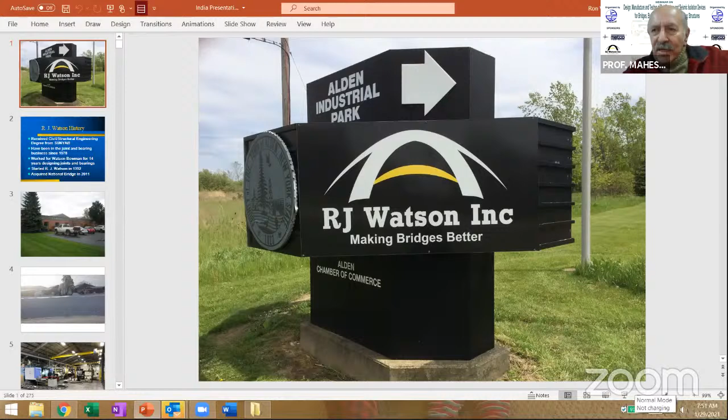Thank you very much for that nice introduction. So the topic is bearings.

I think you covered my background, but one point I wanted to make is I used to work for a company called Watson Bowman, which is a familiar name to many engineers. That was a company my dad started back in 1970. I worked for him for many years, but he sold the business in the 80s, and then I continued working for the new ownership. In the early 90s, they decided to get out of the bearing end of the business to focus more on joint systems, and my training and background was more on the bearing side. So that's when I started RJ Watson back in 1992.

More recently, we acquired one of our primary fabricators. We're located actually in Western New York, in the Buffalo area, which is on the Canadian border, so we get a lot of snow in the winter. That's what it looks like in the winter in front of our building. It's minus 15 today, so it's quite cold.

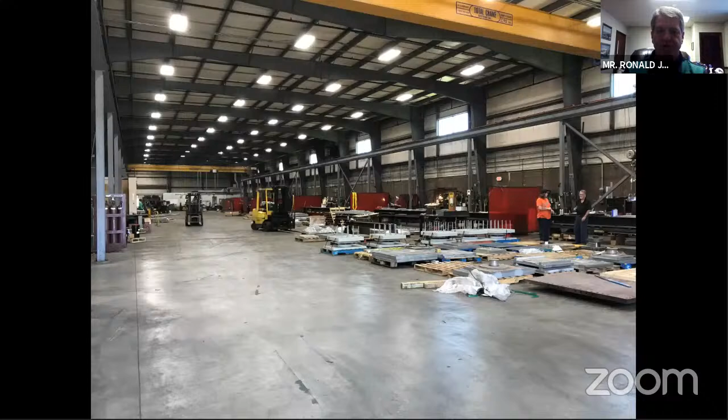So our shop is broken into three primary areas. We have a machining area where we have vertical and horizontal mills, lathes—here you can see a plate being machined flat. We also have a fabrication bay, which is where we do the cutting, bending, and welding of steel plates. And then we have an assembly area, so once all the parts and pieces are finally put together, we have the area where we assemble the bearings together.

And then the last and one of the most important parts is the testing area. We have three test frames that we utilize for testing bearings on projects. So talking about bearings, I always like to start with: what's a bearing supposed to do? And I think the Professor explained it pretty well—they have to take loads, movements, and rotations.

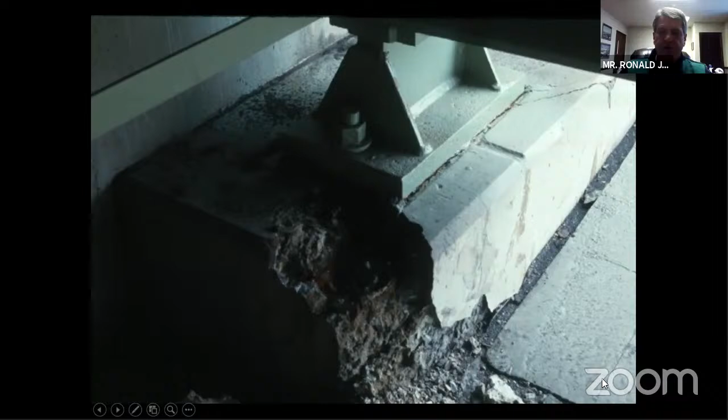The problem with the old steel bearings is they're really one directional—they work in the direction of the girder. The problem we see with these on some structures is where you have evidence of transverse rotation, these bearings are unable to accommodate that. So that's probably what happened here: you're getting some transverse rotation, the bearing is unable to deal with it, so you get the cracking below.

The other problem with the old steel rocker style bearings is they can accumulate dirt and debris underneath the rocking points—that's what we call the ratcheting effect. This has been a problem for many years. So that's probably what happened here: you get this rocker bearing not able to function, and you can see some of the substructural damage. For skewed or curved girder bridges, again you're getting those transverse rotational forces, and these rocker style bearings aren't able to deal with that—here you can see some example of substructural damage.

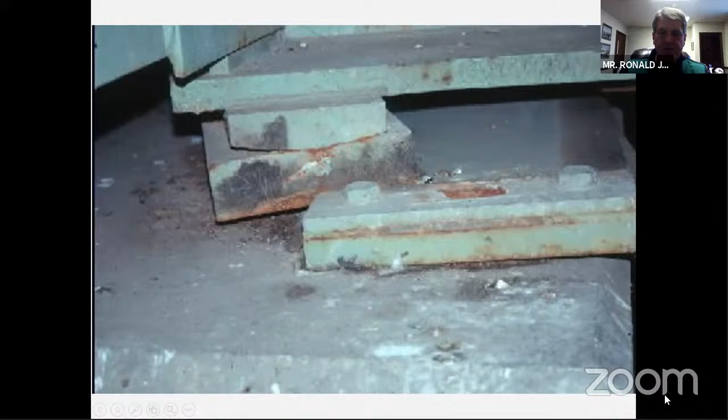This is kind of an interesting one I saw where the base plate was walking out. Normally those anchor plates are bolted down, but for some reason this one wasn't, and it's sort of walking out from underneath the bearing. We had a bridge up in Albany, New York, that was sitting on one of those tall steel rocker bearings, and during a temperature extreme, it actually tipped over—this is supposed to be standing upright.

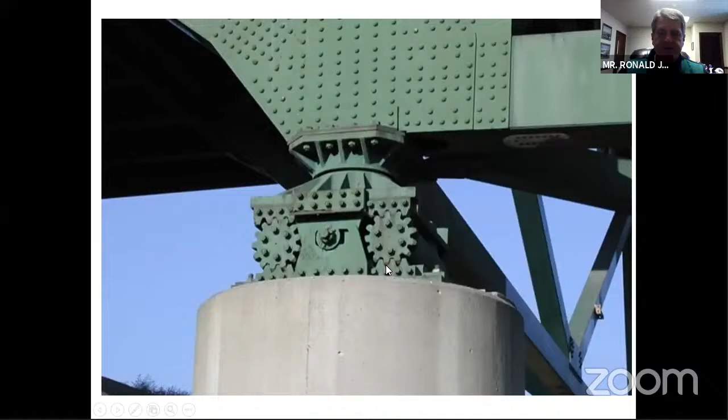The bearings on that structure were the rack and pinion geared roller style bearings, very expensive bearings, as you can see. The problem with a bearing like that is you'd have to have some kind of regular maintenance program to keep those gears lubricated. And sadly, I know especially in the U.S., we don't spend a lot of money maintaining bridges. They're not funded, and it doesn't typically happen.

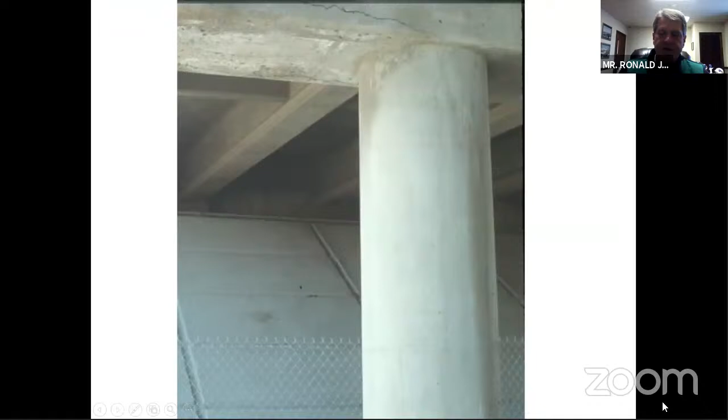As was this structure. This is the monorail structure in Las Vegas, and had a hammerhead pier, and they went integral with the design. But look at the cracking that's going on. It actually goes all the way around that hammerhead to the backside as well. Now, had they chosen to use some type of a bearing, they might have alleviated some of the stresses that went into that pier.

But the workhorse bearing we see used on most bridges is the rubber bearing or elastomeric bearing, typically neoprene or natural rubber, reinforced with steel plates for shear stiffness. So for most of your short and simple span bridges, these work well. The problem, what we see, is a lot of owners like these bearings, and then they try to push the envelope and try to use them maybe in applications where they really shouldn't. So we see a lot of big elastomeric bearings being utilized. And most of the problems I've seen with these have been on the very large ones.

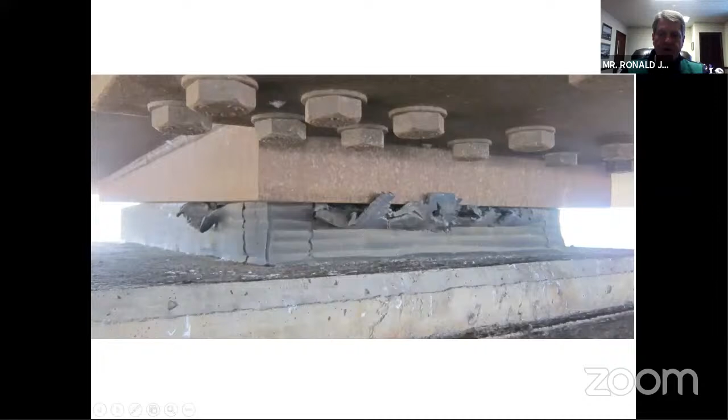Oftentimes you'll see bulging up on the edges of the pads too. This is a very large one on a bridge in Mississippi. And so, you know, engineers say, well, what's the problem with that? Well, if you cut it open and look at it, that's when you have bulging, that's what's going on the inside. So that would be a sign of some serious problems with that particular pad.

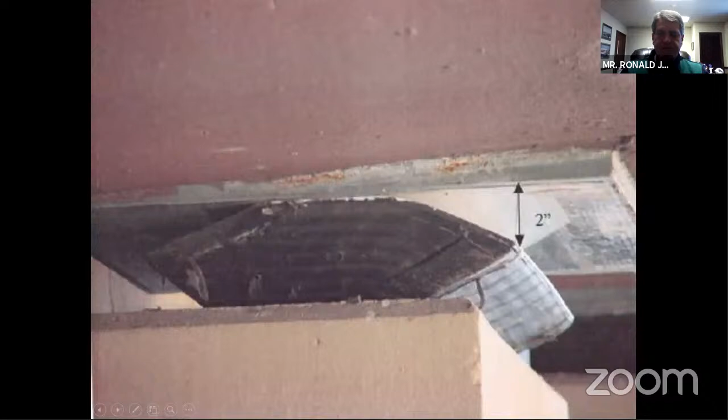Installation problems, again, things like that you see with all bearings. This is a picture I got from a Colorado bridge engineer, and they used these big pads with sliding on top. And as it was cycling, for some reason, it wasn't recovering. So maybe, you know, maybe that's a design flaw. The plates weren't thick enough or something like that. But again, these are big pads that you don't necessarily want to do.

And then lastly, we've had a lot of reports of pads walking out. So as it cycles with movements and rotations, the pad is actually walking out from underneath the girder. So that's a problem too.

Now, pot bearings were developed as a way to reduce the plan area of a rubber bearing. So you put much higher pressure on the rubber in a pot bearing. In this case, you're going up much higher. So what happens is the rubber becomes unstable. So you have to have some kind of a sealing ring around the perimeter.

There's a lot of different materials being utilized for sealing rings. But this is where we've seen a big problem, especially in the USA, is these sealing rings failing prematurely, and when that occurs, the rubber kind of squishes out of the cavity.

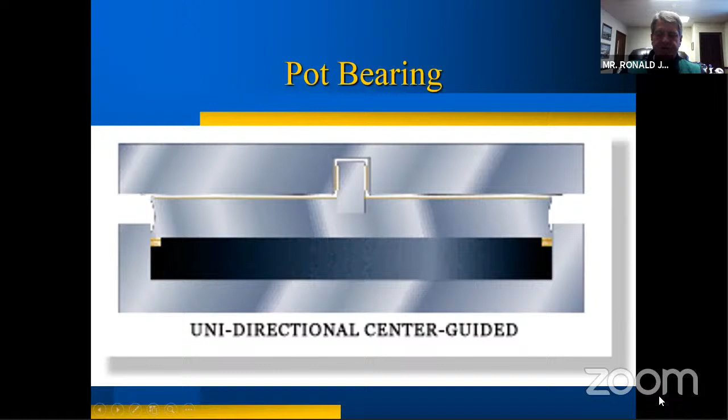So with these problems in mind, the disc bearing was developed. Disc bearings, as stated earlier, were developed in the early 1970s. The key is the use of this polyether urethane load and rotational element.

Polyurethanes have tremendous compressive strength, excellent weathering properties, and a very wide operating range. It remains stable and flexible from -70 to +120 C, so for normal atmospheric conditions it remains stable and flexible.

In its simplest form, as a fixed bearing, it's just two plates sandwiched together with a central pin there to transmit the horizontal forces. The way this works is you're compressing that polyurethane, the material wants to expand, but the friction between the plate and the urethane rubber inhibits the expansion, so you get a bulging effect on the edge of the disc.

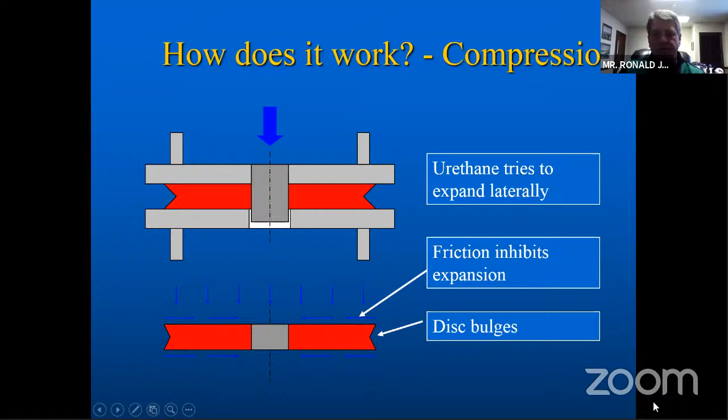The reason for the V-notch in the edge of the disc is to reduce the shape factor and control the amount of deflection you get under design load and rotation. So if I load and rotate that disc, this is what it looks like - there's the rotated edge, and it just fills in that cavity. Close-up view, you can see what it looks like there. So that's the function behind that V-notch in the edge of the disc.

So these are examples of fixed bearings. Again, it's a very simple design.

If you want to introduce some displacement capability to the bearing, then we add the sliding materials. Typically we use PTFE, although there are other materials now being utilized for sliding friction, but PTFE offers the lowest friction of anything. Oftentimes it's lubricated, so you have dimples there and you put silicone grease in there. We bond it to the upper bearing plate, but we also recess it in there, so it's mechanically locked as well as chemically bonded.

Mated up against stainless steel, you get very low friction. Usually plain PTFE you get around 2% friction. If you lubricate it, it's even lower than that, even less than 1%. So now you have a bearing that can move in any direction, but also rotate in any direction as well.

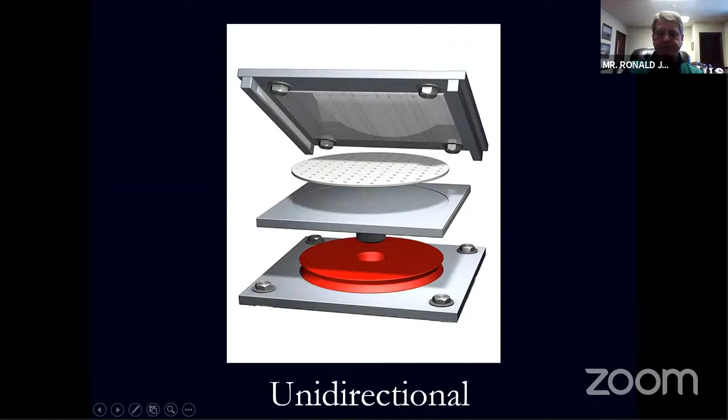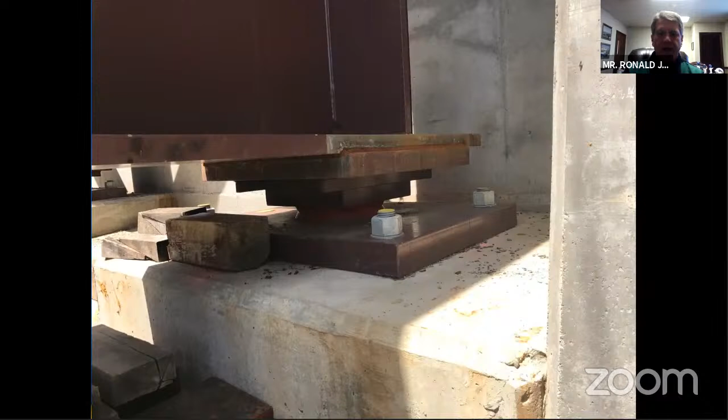But the polyurethane we're using has tremendous compressive strength. We load it to 35 megapascals, which is the allowable, but the ultimate strength is probably 20 times that. So you have a tremendous safety factor in the vertical load carrying capability of the polyurethane.

A big project we've been working on for several years now is in New York City - LaGuardia Airport. They're spending $8 billion to redo LaGuardia Airport, so it's crazy, but we've got lots of bearings. When they redo the terminals, they redo the roadways in front, so there's over 1,000 disc bearings at LaGuardia Airport now.

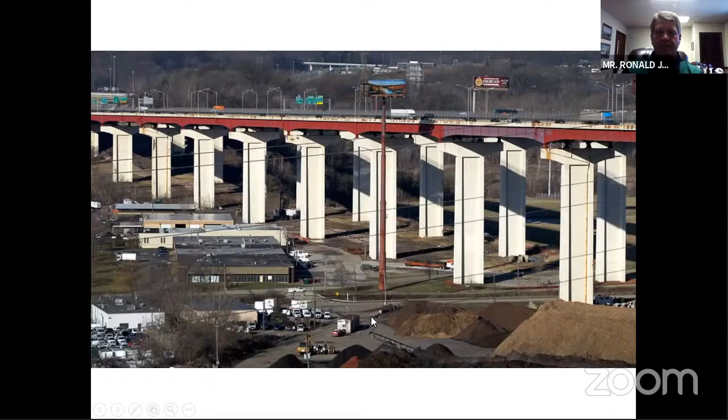This is a big project we did in Cleveland, south of Cleveland, not too far from Buffalo. These are parallel plate girder span bridges. It's the most heavily traveled bridge in Ohio. The bridges are 40 years old, but really the issue is traffic.

Rush hour, morning and afternoon, looks like that, so they needed to expand it. What they're doing is building a new bridge in the middle, and once the new bridge is finished, they'll switch traffic back over to the outer sides.

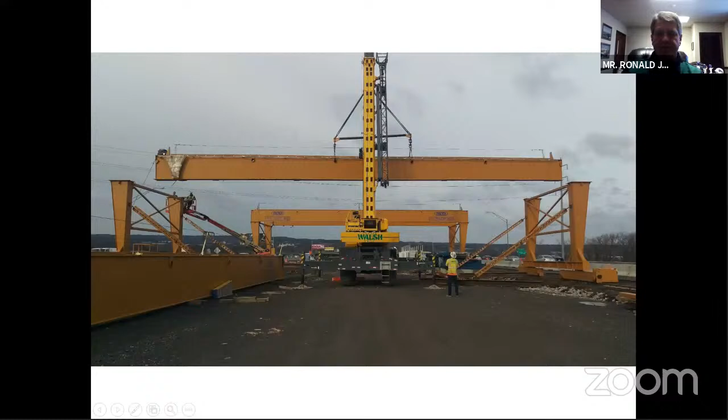So they have this little erection gantry they use to drop the girders in place. Here you can see a picture of that. It spans the two existing bridges, and they pull the girders up from below, so you can see how that works. There are 133 bearings on that project. The loads are pretty standardized, not too high.

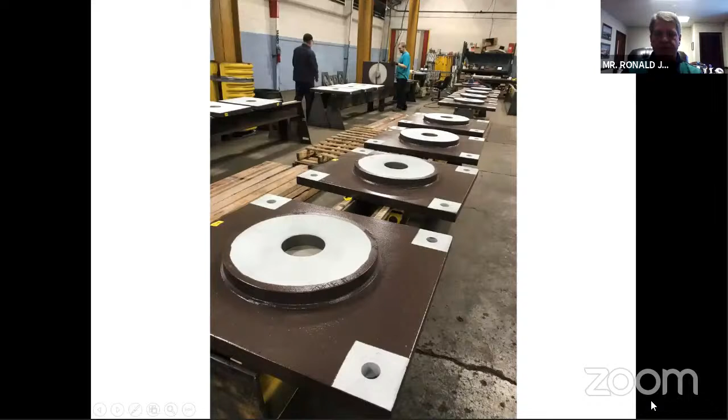So there's your masonry plates, then you weld the lower bearing plate to that. There's some painting going on as well. You don't paint the surface that comes in contact with the disc, that's a sandblast surface, you want a roughened surface there. Then they're fully assembled, so there you are.

We're doing a field weld. Again, when field welding, you want to maintain certain temperature limitations so you don't overheat the PTFE or the polyurethane, so care has to be taken for that. There you can see one of the installed bearings. Then we always put a little information plate on each bearing with the manufacturer, date of manufacture, the bridge, the bearing type, and all the pertinent information is on there.

So there you can see that's the new bridge. Now they're going to retrofit the existing lane. It's kind of a cool project.

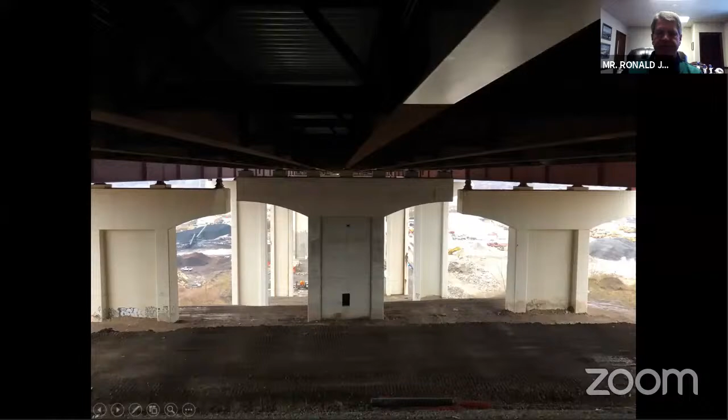Here's a neat bridge, this is a Delta frame design, so the bearings are actually down here below. This is in West Virginia. There the bearings are shipped to the job site, then you set them up on spacers, and they're grouted into place. That's the finished bridge. Those bearings are actually quite easy to inspect since they're down so low.

Steel boxes use disc bearings. This is in Orlando, Florida. In this case they have two bearings supporting the steel box. Nice looking detail for a bridge. This is another steel box application.

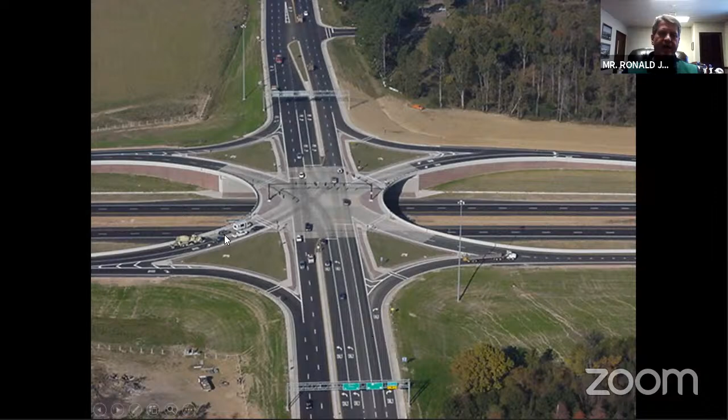There's a lot of different designs for interchange exit and on ramps. This is a SPUI, single point urban interchange, so these are ways to deal with traffic getting on and off the bridge. These are steel boxes, and it's interesting here, they have 2 bearings on these boxes and then 1 on the outer boxes. So interesting design detail there.

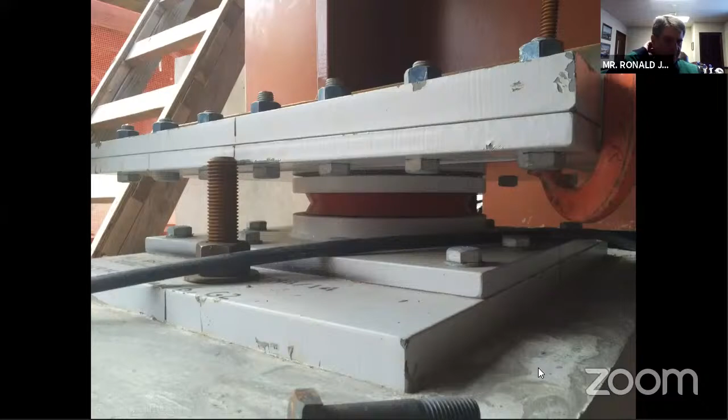Steel arches, this is the Sellwood Bridge in Portland, Oregon. Little shout out to the iron workers who built that bridge. So there's one of the bearings at the abutment, you can see the disc bearing being installed. There's also bearings on top of the spandrel columns too.

And then there's bearings, actually lateral bearings between the shear block and the arch rib, so we do a lot of lateral bearings as well. There you can see a disc bearing installed like that. Now the lateral bearings are only maybe activated during wind or seismic loads, but the nice thing about the disc bearing is it can accommodate rotations at low or even zero load, there's no minimum load required for that bearing to accommodate rotations. So we do quite a few of these lateral bearings on big bridges.

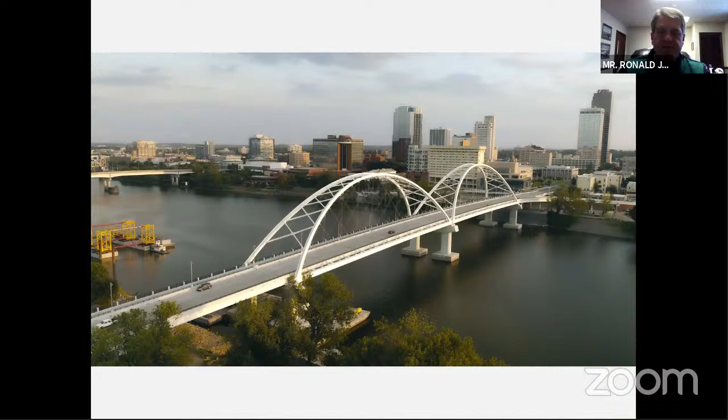This is one in Arkansas. This bridge sits on disc bearings as well, nice looking structure. But they had an interesting application during the erection of the arch ribs here, they have these temporary struts as you can see here, and at the base of that strut is a rotational disc bearing.

We also worked on the Hoover Dam Bridge. This is on the Nevada-Arizona border, not too far from Las Vegas.

If you're ever in Las Vegas, this is not too far away. This is a North American record, about a 320-meter span for a concrete arch. 24 disc bearings are on the tops of the piers there.

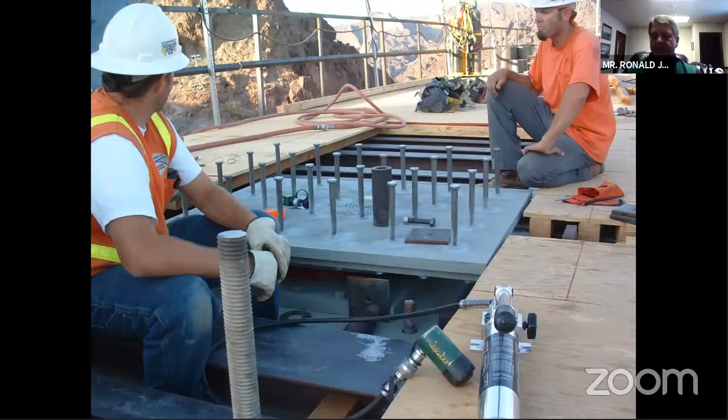The renderings are so good now you can't tell them from the real bridge. But most of the specifications we deal with have a replaceability detail being required of the bearing, should something go wrong, so that you can get at it and remove it.

So here's a pretty typical detail. You have a cast-in plate, but the upper bearing plate is bolted into that. Similarly, you have the masonry plate grouted in, but the lower bearing plate is bolted into that. So to facilitate removal, you would jack the structure, draw those bolts out, and you can pull the bearing out in one piece.

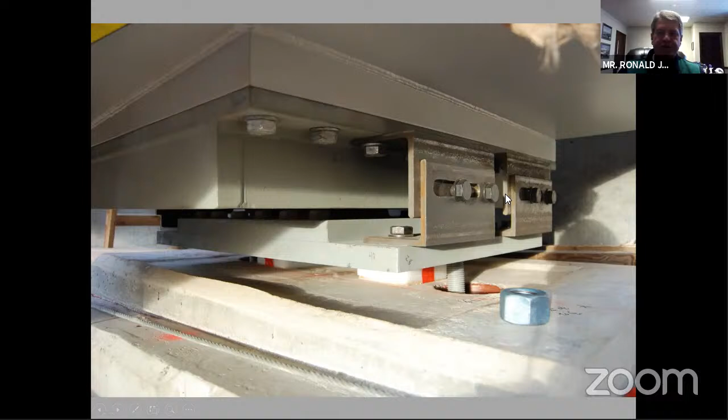That's about 300 meters up, which is a little higher than I normally like to go when I'm looking at bearings. These bearings are big, but in some cases slide bearings, so they can move around on you during installation. So oftentimes we'll put external hardware like this on the bearings, which connects the upper and lower plates. It's slotted, so you can adjust it for the temperature setting. Once the final connections are made, you take that hardware off.

Now, the reason this was like that on this bridge, they had not installed the joint yet, so that was temporary. But that's something when you're doing your inspections, you want to monitor that the deck water is not pouring down on the bearings, especially up in our part of the world, where we dump road salts, de-icing salts on the highways. That salt water getting down on the bearing could cause problems. So that's something you need to deal with.

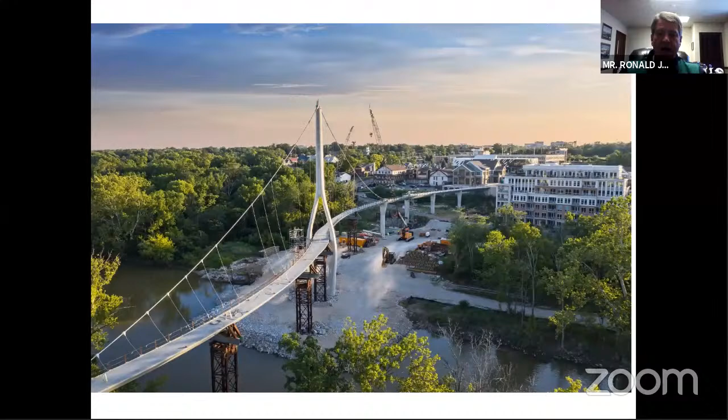I say new bridge, it was actually 13 years ago, so it's not so new anymore. But that bridge, start to finish, 11 months. So if you get everybody on the same page, you can do stuff like that.

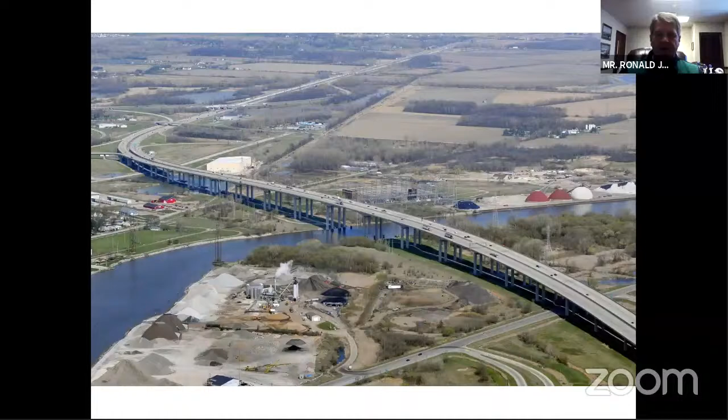This was a retrofit we did, I-75 up in Saginaw, Michigan. The original bearings were pot bearings. All of them failed - there was like 130 of them. They had the sealing ring failures, and they decided to replace them. So we replaced them with some disc bearings.

I forget which bridge it was, but I went out two years later and the temporary hold downs were still on there. So we paint them bright yellow just so people remember to take them off when they're done. But that's a big bearing.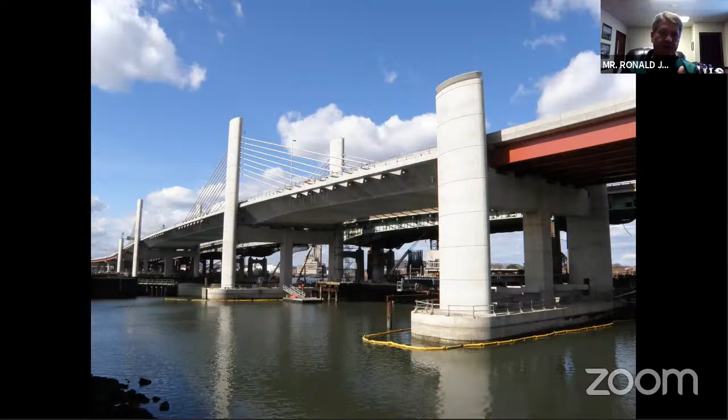This is what we call an extradosed bridge. I know there's extradosed bridges in India as well, but an extradosed bridge is a cable supported bridge, but instead of big tall towers, you have a short squat tower. So this is cost effective in a certain span range, but the main pier here, big heavy concrete bridge, some of the bearings were designed for over 45,000 kilonewtons.

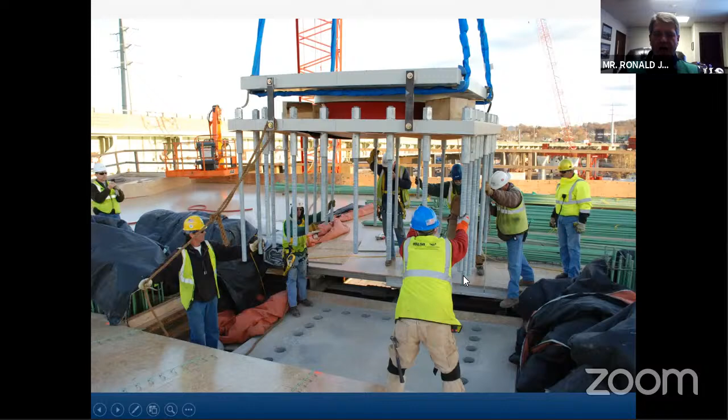There's a picture of them doing the installation. They're sitting there as I was watching this, hoping those anchor bolts line up with those holes, but it worked out in that case. So of course they wanted that tested.

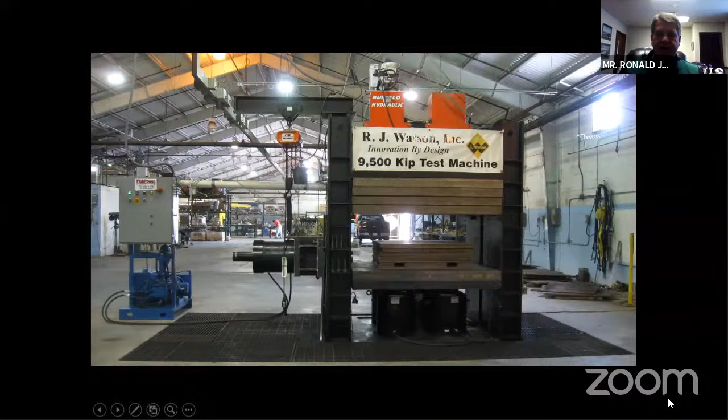We have a test frame that goes up to maybe 40,000 kilonewtons, and there's the vertical actuators, lateral actuators for horizontal or friction testing. There's the big, we have a large displacement actuator, so we can do like plus or minus 650 millimeters on a test frame. So if you have some large displacement bearings, we have that capability to test it.

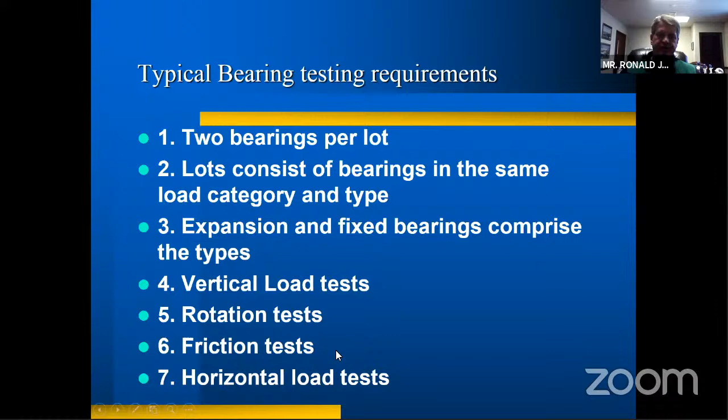Just to talk a little bit about testing: typical testing, you have to test two bearings per lot. Lots are usually limited to 25 or less bearings. They're usually bearings of the same load category and type, so they might be broken into fixed and expansion bearings. And then we usually run vertical load tests, rotation tests, friction, and horizontal load tests as well.

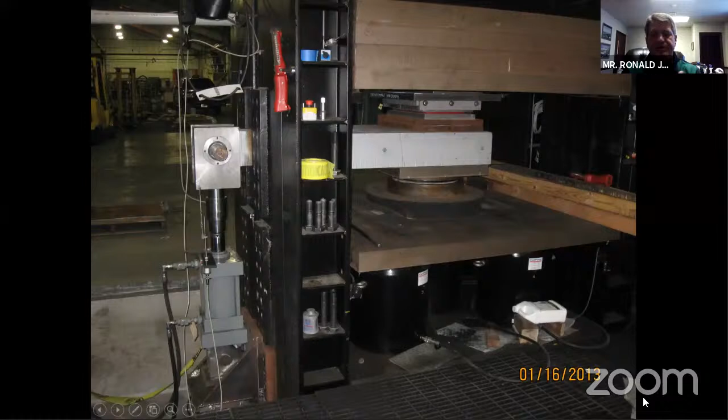Another test that's popping up in the States is the long-term deterioration testing, cyclic rotation testing. So this is our cyclic rotation test rig. We're pushing that lever arm up and down, and that rotates the bearings in the test frame there.

These types of tests take a long time. Normally they're used for vendor qualification, anywhere from 5,000 to 15,000 cycles, so you're talking months of testing. A lot of the manufacturers are required to do this to get approved for certain states.

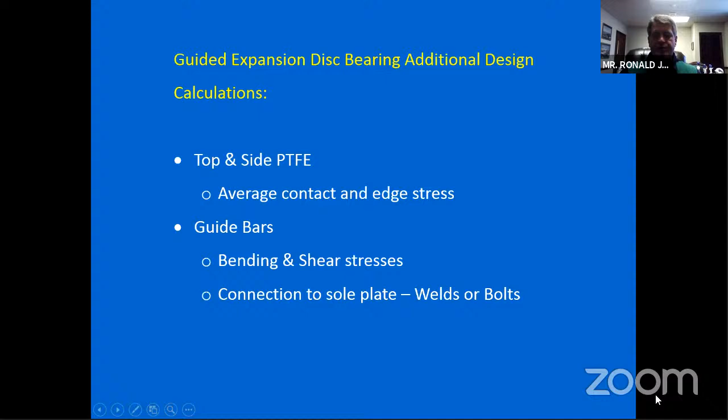If you want to actually do a design session, we could orchestrate that as well, where we actually go through some real designs.

Uplift is quite common now, especially in seismic zones, because earthquakes don't just go back and forth, they go up and down as well. So seismic designs often have uplift. Sometimes a curved ramp might have a negative vertical load. But the one we're seeing a lot now is flood-prone regions. We saw that during Hurricane Katrina, where sections of Interstate 10 floated away. You don't think of bridges being buoyant, but they can be with a storm surge. So that might be another reason to use an uplift bearing.

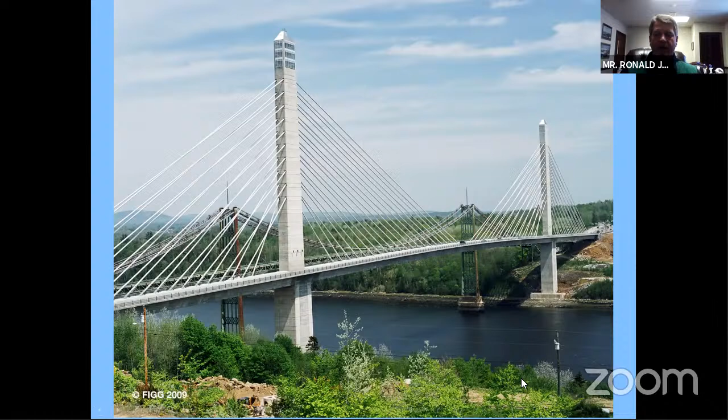But lots of bridge applications with uplift - I think I showed you a couple already. This is the cable-stayed bridge up in Maine, Penobscot Narrows, kind of a neat bridge. They got an observation deck in one tower, so you can take an elevator up to the top and look out over the countryside. So there's one of the uplift bearings for that - it had large displacement as well, high uplift capability.

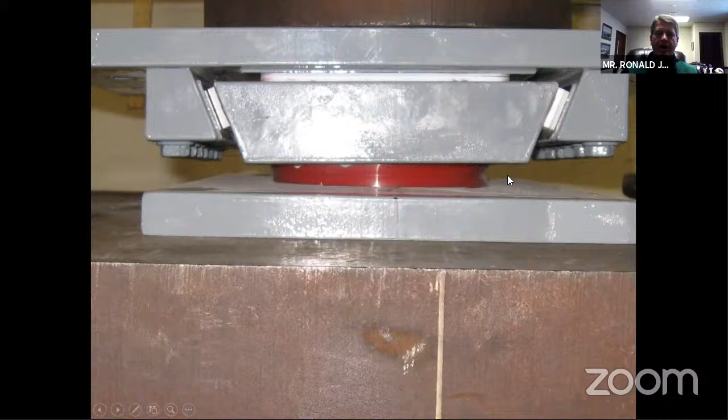This is in New York City, Atlantic Avenue Viaduct. They were replacing these girders on nights and weekends so they could maintain the rush hour trains. There's a little hinge detail there where the bearing had uplift requirements. The problem is we didn't have a lot of height to work with, so we had to come up with a modified design. Instead of the guide bar lipping underneath the upper bearing plate, we used a wedge plate design like that, which enabled us to achieve the uplift in a much lower profile.

This is also a project in New York City, the Kosciuszko Bridge, and that had uplift bearings. There you can see the uplift pins being installed, and that's what it looks like with the guide bars with the lips on it - another uplift application in a New York City bridge.

We do a lot of international projects too, and we got involved years ago in the Bandra-Worli Sea Link Bridge in Mumbai. That bridge sits on disc bearings as well, and those were manufactured by Metco in their facility in Kolkata.

And there you can see some of the bearings with the nice galvanized finish on there. And this is a picture of one supporting the big segment there. So that was an interesting project to be involved with.

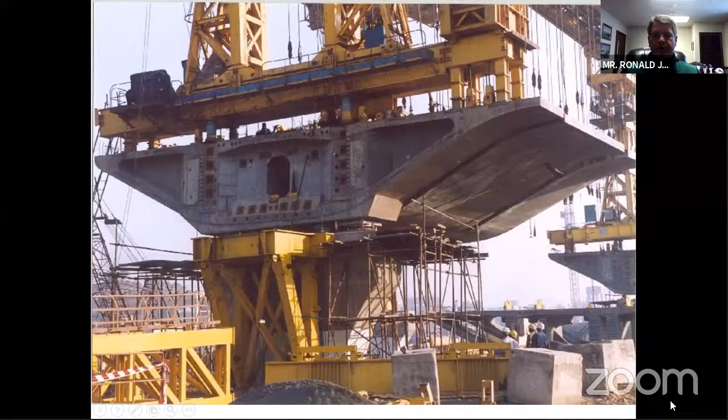Beautiful bridge. Another one that has disc bearings is the second Vivekananda Bridge. And that's, again, what we call an extradosed bridge, cable supported, but not big tall towers, short towers like that. So that bridge sits on disc bearings as well too. There's a picture of one of the bearings installed on that.

This is the Port Mann Bridge in Vancouver, BC. That sits on disc bearings. There you can see one of the bearings for that.

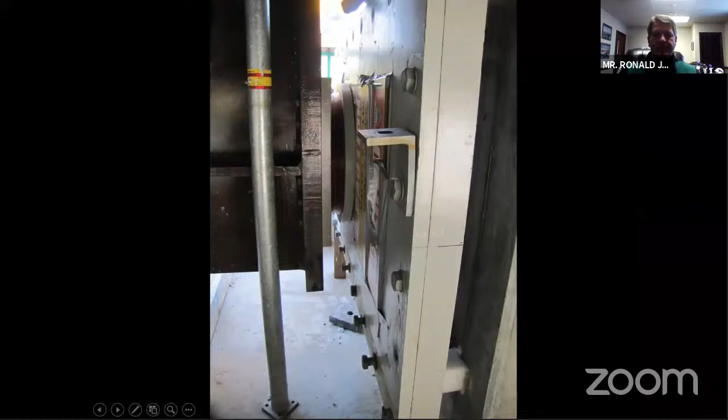Also lateral bearings. Again, this is between the deck and the tower. We talked about lateral bearings previously, and you can see what that looks like.

This is a retrofit. This is the Manhattan Bridge in New York City. It's over 100 years old, and the original bearing design was this rocker nest, like you see. That's what they call those when they put rockers together. But you can see where the bolt had sheared off the last rocker there, so they decided to replace these with up-to-date bearings. So there's the disc bearing design. Kind of an interesting design. It's a common masonry plate for two discs, and that was what we came up with to fill in that gap where the old rocker bearings were.

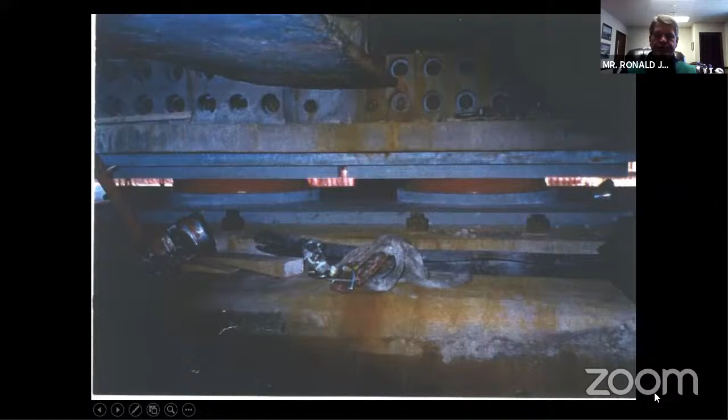There's another bridge in the New York City area. This is the Goethals Bridge. And there you can see the bearings with the upper beveled plate to accommodate the grade. They're going to be cast into the superstructure. Stainless steel hardware. Again, that's a detail we're starting to see being utilized, because if you want to replace the bearing, the bolts need to be able to come out and the nuts need to be able to come off as well too. So stainless steel is starting to pop up.

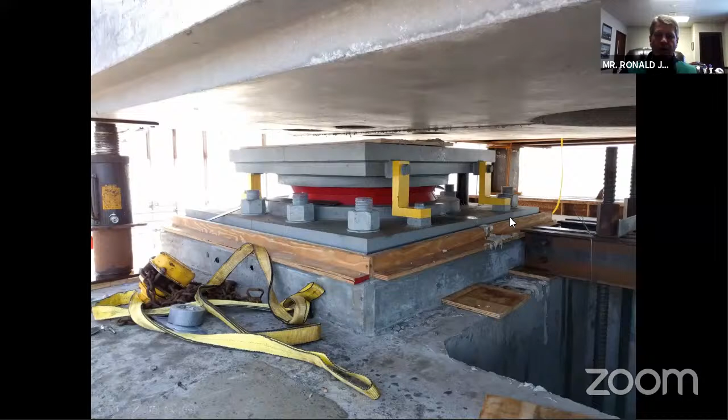Outer Banks of North Carolina, segmental bridge design. There you can see one of the disc bearings. There again, your temporary hold downs painted bright yellow as a reminder to take them off when you're done. Picture of the sunrise there over the bay.

Another beautiful segmental bridge in Virginia Beach, Lesner Bridge. There you can see the bearings being installed on that as well too.

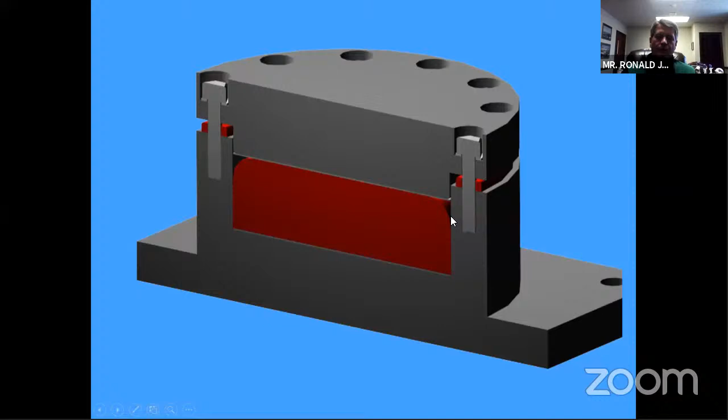So high rotation is another thing that pops up quite a bit. Typically, the standard disc bearing can get anywhere from 2 to 4% rotation, but we've seen higher rotations in some cases. We had a project in Texas where they wanted 8% rotation. So this is our design. It's kind of a modified disc design. It's like not unlike a pot bearing where you have a cavity where the polyurethane is put in. You don't have to seal it because we're not overstressing it. But we use the outer wall for high rotations or high horizontal forces, and that's a picture of that bridge.

Beautiful bridge. That's Calatrava design, famous architect, Santiago Calatrava, on that structure there. There you can see one of the disc bearings with the bevel plate, and they drop this steel beam on top of it there. Close-up shot of that. Just a nice substructure design.

I thought this is a bridge in Vermont, segmental design, but they jazzed up the piers with that brick-like work. So it looks like a masonry pier. It's not really a masonry pier, but it looks like it. So thought that was kind of nice looking. There's one of the bearings for that project.

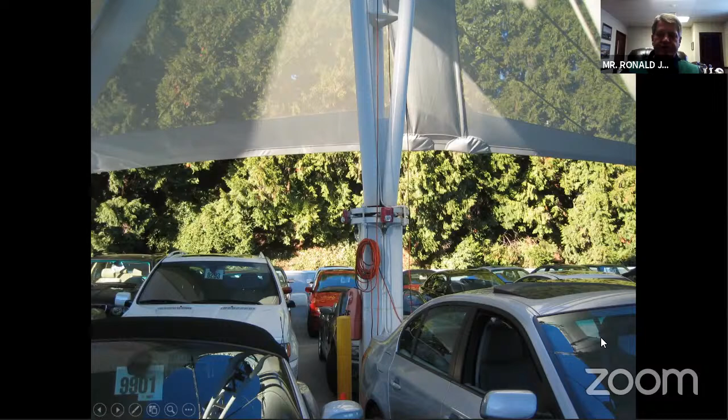We got an order for one bearing once. I'm thinking, well, what is that for? It was actually this tent structure. So halfway up that column, it splays into 3 columns, as you can see there. And so there's actually a disc bearing in the middle there that allows rotation of that structure. So in behind all that emergency lighting is one disc bearing.

I thought I'd get a discount as a BMW dealership. I thought I'd get a discount on a new BMW. And he said, no, that doesn't apply. So I still drive a Jeep.

So curve girders create problems for engineers in trying to determine the direction of expansion and contraction. And I think if you go by the rule book, you go from your fixed point to your expansion point and you draw a chord. But I mean, who's to say that's the way the bridge is really going to want to move?

One of my favorite curve girder bridges is this one in Japan. So imagine trying to predict which direction those bearings are going to move. But what we see is I've seen guide bars misalign. I've seen guide bars shear off.

So in this case, looks like it's about to shear off there too. So what you can do where there's uncertainty about the direction of displacement is put some polyurethane pad on the guide bars. That gives you a little bit of lateral flexibility. It's a tight fit, but it gives you a little bit of lateral play in either direction. So that's what we call flexible guiding.

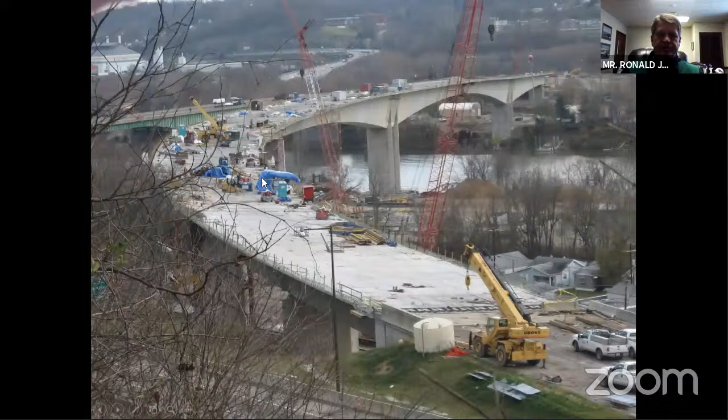So here you can see the flexible guided bearing on that bridge. This is another one in West Virginia. You can see, again, curved ramp, so they wanted to use flexible guided bearings. In this case we colored it yellow. It's a little bit softer material than the load element, so we changed the color on it.

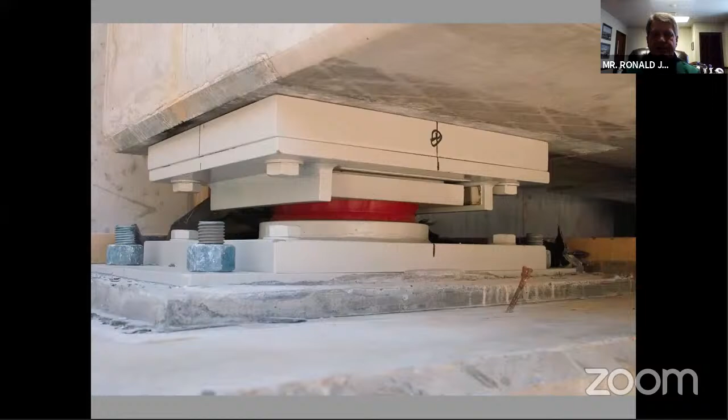We do a lot of light rail work. This is one in San Diego, a steel plate girder bridge sitting on our disc bearing. There's their replaceability detail. They have an extra sole plate, and then the bearing sits in a recess so you can pop it out if need be.

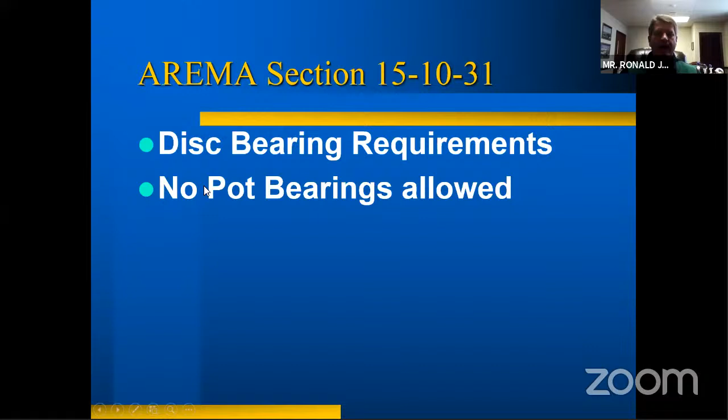Class 1, the heavy rails. This is a project in North Carolina. You can see disc bearings being used. Now, AREMA is the guidebook for railroad bridges. AASHTO is what we use for highway bridges. A little bit different spec, but they have a disc bearing requirement and specification in AREMA. They do not allow pot bearings in railroad bridges in the USA.

This is a heavy rail bridge over the Ohio River. The original design on this main span was to be a swing bridge, and they actually swung it open once or twice after they built it, but it's over 100 years old now. They hadn't swung it open, so they removed the old wedge plate bearings and installed new disc bearings in place. So there's a good example of a retrofit on a rail bridge.

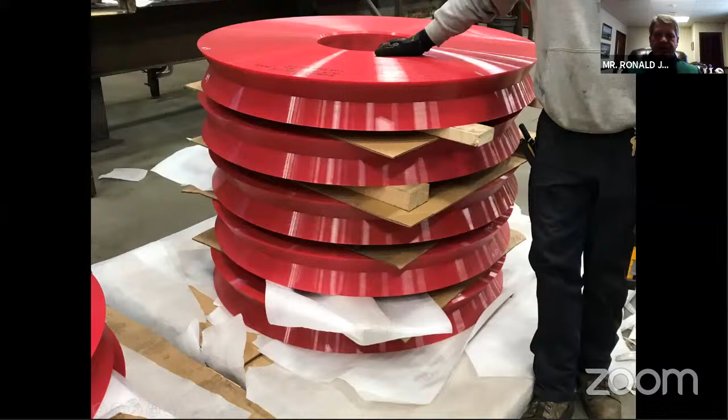And then we're building these bearings right now. This is a rendering of the new Merchants Bridge in St. Louis over the Mississippi River, and big bearings on that one. You can see some of the discs are quite large. And that's the slide plate. You get an idea how big that bearing is. So big, massive bearings we're building for that.

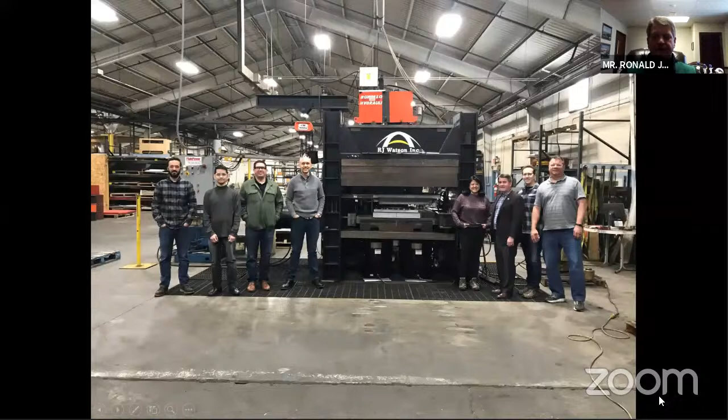A couple of ongoing projects we've got going right now. This is the LAX people mover at Los Angeles Airport, that's that famous tower there at LAX. They're building the new people mover. They don't have a lot of bearings, but they're big. They're in California, so big seismic design. Here you can see some horizontal load testing we were doing for that. They actually sent 8 engineers out to witness this, just before COVID hit last year. There you can see one of the bearings being installed on that project at LAX.

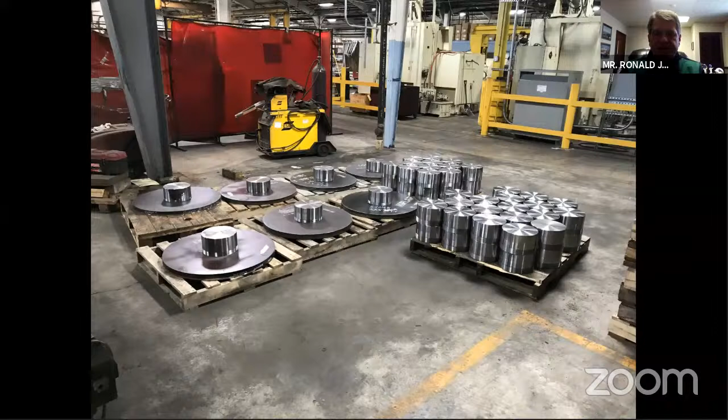We're also working on the high-speed rail in California. The goal is to go San Francisco to LA. Right now they're working on the section from Bakersfield to Fresno, so it's this section right in here. There you can see some of the construction of the high-speed rail in California. Lots of bearings — we've got 400 or so disc bearings going in on that section. Nice thing about that job is there's a lot of the same, so we get to make a whole bunch of the same type of bearing.

This is one in DC, a rendering of the Frederick Douglass Bridge. Big slide plates on those bearings, as you can see there. There's some construction shots from the summer.

And then this is the new rendering of the new Ganga River Bridge near Sultanganj, a project that Metco's working on right now. They've actually fabricated some of the uplift bearings, and there's a picture of one of them. This bridge has service uplift, so for that we have a dual disc design. There's your vertical load disc, and underneath, though you can't see it, there's an uplift load disc. So when this goes into uplift, it pulls on and loads the disc below.

So it's a dual acting uplift type bearing. A beautiful looking bearing in Metco's facility there.

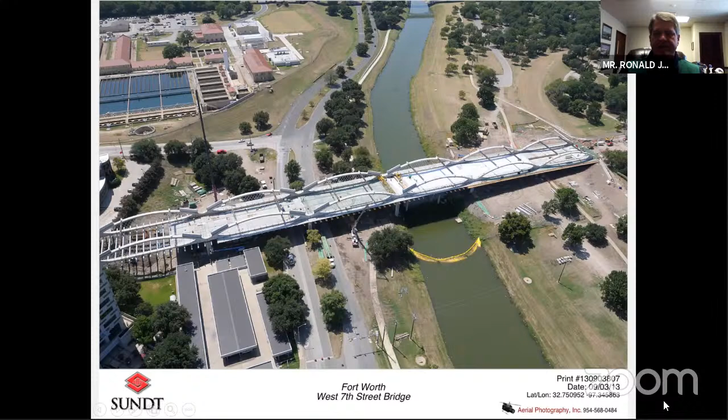We had a project in Texas, Fort Worth, where they were dropping arch ribs down on top of the bearings. They had some kind of accident, a crane tipped over or something, and all the load ended up on one edge of the disc. The entire weight of the structure was pinching one edge of the disc. The contractor called me up and said, hey, I think we're going to have to replace some of these discs because of this construction accident. I said, well, jack it back and see what it looks like. So they jacked it back, and there was no damage at all. That gives you an idea of the durability of these polyurethane pads.

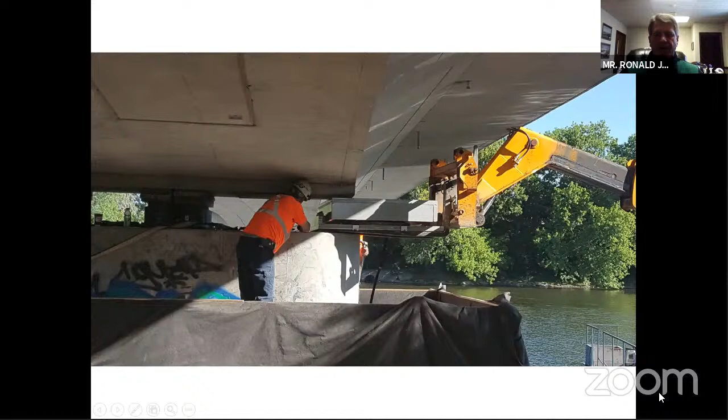Another good example of durability was this bridge we installed some disc bearings on in Canada back in the 80s. Several years later, they changed their seismic criteria, so all of a sudden they had bearings that didn't meet the new spec. There was nothing wrong with them, they just weren't designed for the new loads. Since it was a lifeline structure, they decided to replace the old bearings with our new isolation bearings. But I got the contractor to get me some of the old bearings, and we took a look at the discs.

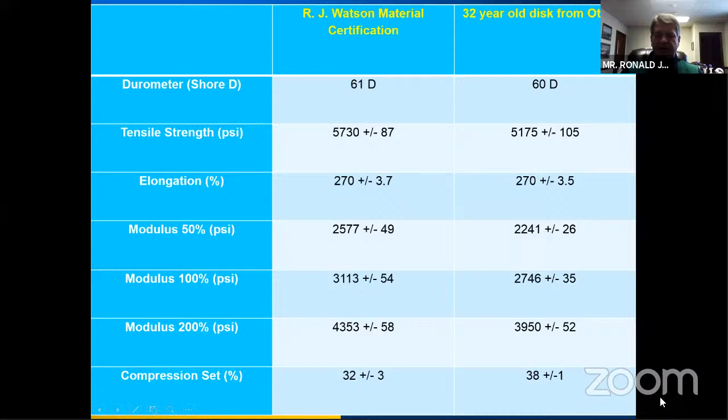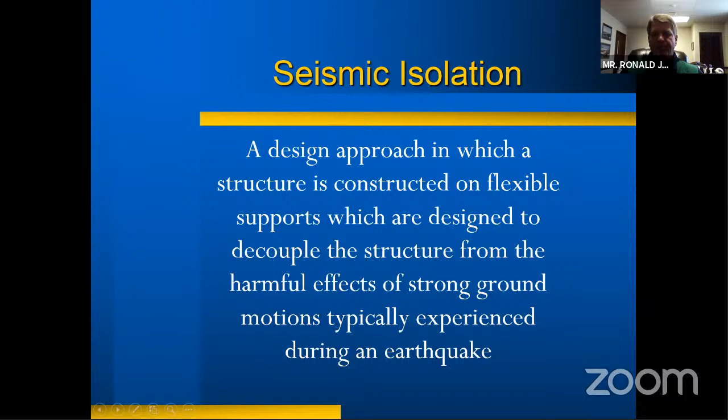So good testimonial. The other thing I wanted to talk about was isolation. For earthquake design, one of the tools engineers have is to isolate the structure, basically creating some flexibility between the substructure and superstructure. The goal is to lengthen the period of vibration of the structure.

So with this problem in mind, the disc bearing can be modified for isolation applications as well.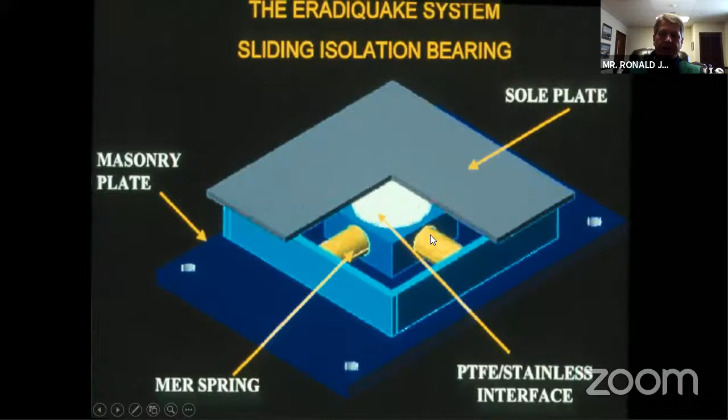So what we do is we thicken up the upper bearing plate, outfit the perimeter with springs, and the springs act as a restoring force to bring the structure back to where it started. The damping comes from the sliding friction. We use this housing to connect the springs to the upper bearing plates, a polyurethane material, a little bit softer than the load element.

So this is a test that we ran on 2 springs separated by a plate, and then there's a rod running down the middle so you can get an idea of how flexible they are. You can do this all day long as you stay in the elastic range of the material. Again, this is kind of like a rubber band—you can just keep compressing it, and it'll continue to exert a restoring force. So not only would it have to compress, but it would have to slide at the same time. This is representative of what it might see during a seismic event.

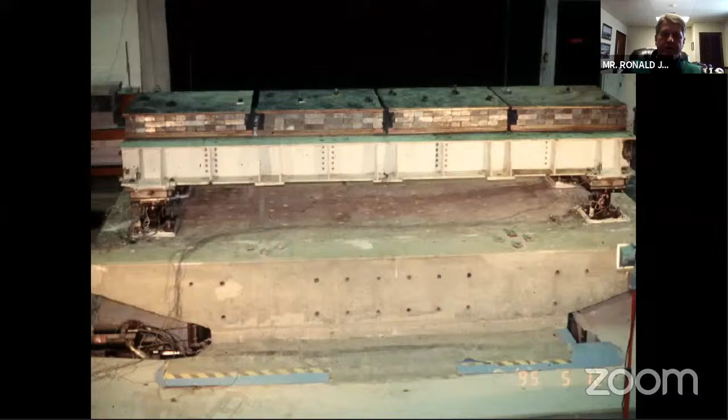We're fortunate, actually located right near the Earthquake Center at University of Buffalo, and they have seismic simulators and shake tables and all sorts of fun testing equipment there. We did testing on this concept many years ago. There's the bearings at the corners, and then you have plate girders and lead bricks on top. We cycled the bearings through like 50 different earthquakes. We got good force reductions, manageable displacements. And then after the earthquake, we just kind of flipped the machine. Now that picture's a little grainy—that was probably an 8mm camera back in the day, but that's more like a durability test.

So you can see the shake table shaking away, and those are the yellow springs that are shoving that back and forth. After the 50 earthquakes and then the durability tests that we ran, that's what the bearings look like—still functional. So they still work after 50 earthquakes. And that's important because earthquakes don't come as one event—there's precursors and there's aftershocks as well too.

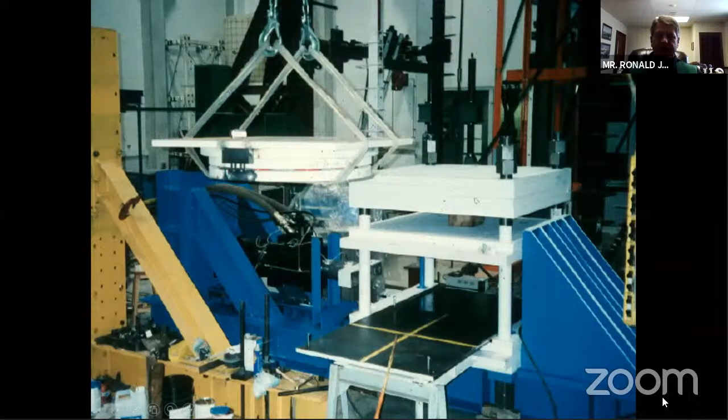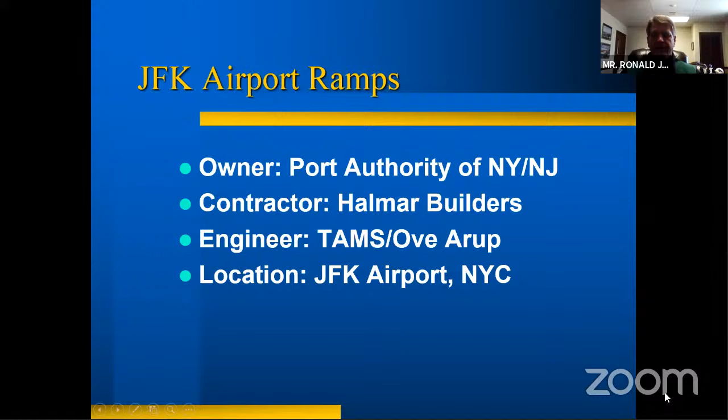So there's our seismic high-speed test frame. We actually built this frame and donated it to the university, so all the high-speed testing that we do is at the earthquake center there. Lots of projects—you always think of California when you think of earthquakes, but I think it's like 39 out of 50 states have seismic issues, and New York has seismic issues as well too. I think the big difference is frequency. They have much more frequent earthquakes out west, but the potential back east is just as good.

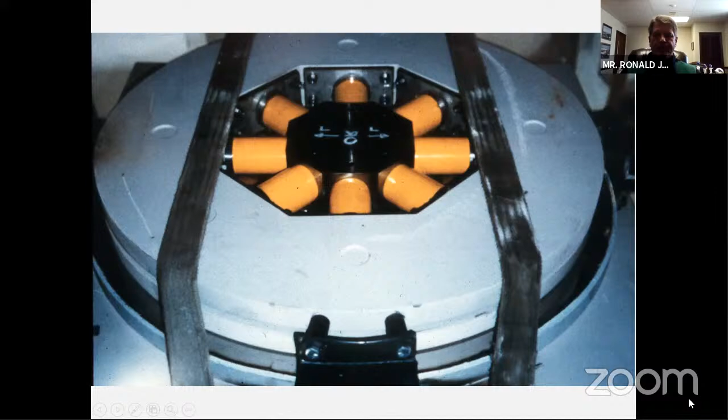This is our airport in Buffalo. We have seismic issues there too. The engineer didn't want square bearings—he wanted round bearings. So we have an octagonal upper bearing plate with springs around the perimeter. If you look on top of the column there, that's one of our seismic isolators.

So that project, they weren't real big bearings, but there were 16 of them, 16 isolators, and the whole project was just replacing the bearings. So the total cost was $70,000—that's including jacking, removal, and replacement. So not crazy money to seismically upgrade a lifeline structure.

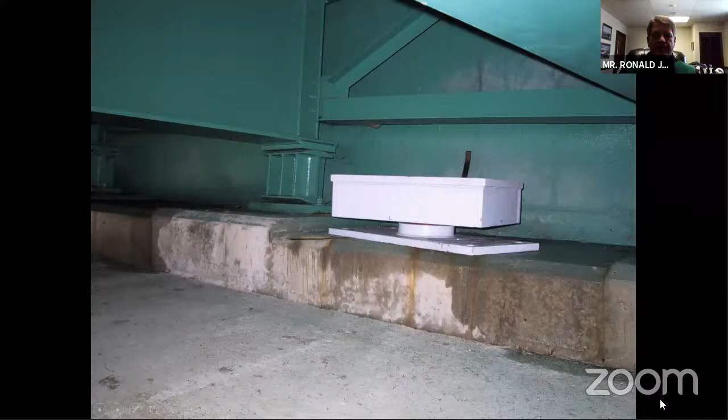This is one we did in southern Illinois, replacing the old rocker—there were 481 of those that we replaced. So there's the new isolator that we supplied for that—retrofit of an old historic truss.

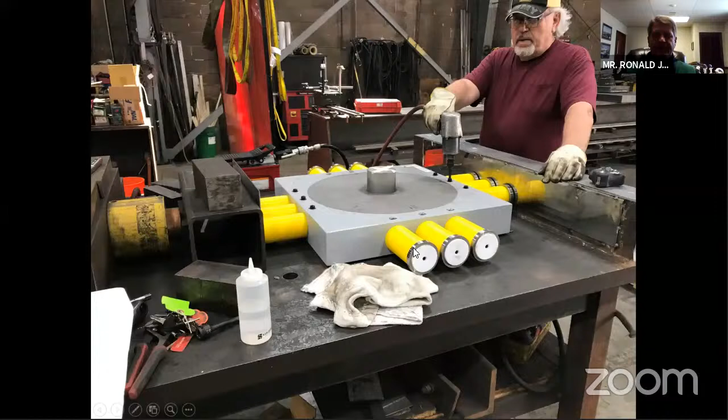Again, the other thing you can do is you can change the stiffness in different directions. Usually laterally, the springs are a little stiffer than the longitudinal springs, but that can be done with this type of bearing. People often ask, are those springs loose or are they press fit in there? And the answer is they're press fit in there. So this is our 40-ton jack to compress the springs.

These are set screws that hold them in place. Then once the springs are pre-compressed, they're put inside the box, and we release the pressure once they're in there. So that's how we make them.

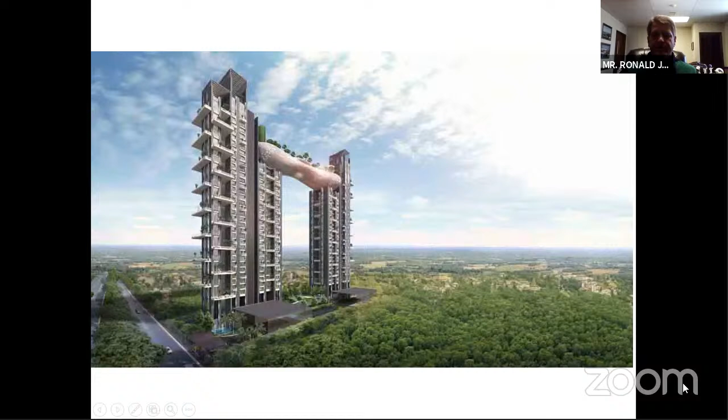One of my favorite projects, this is the Atmosphere condo in Kolkata. It's got a sky bridge, and the sky bridge is huge - there's a health club, nightclub, pool, trees all on the sky bridge. There are 4 isolators, 2 at each side, but they're massive, really big bearings. We actually made those here in Buffalo and shipped them out to the site.

So there's the workers - I thought that was kind of cool. They were putting religious artifacts on the bearings to bless them, and then they were lifting them into place. And there's the installation, so that was an interesting project, supplying big isolators like that. I think that was a recent picture someone sent me - they got the trees on there.

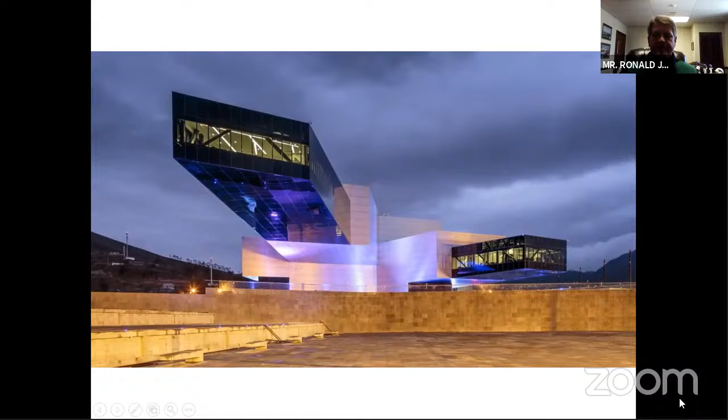This is another interesting building project, the UNASUR building in Ecuador. It's got these cantilevered sections of the building. This building's right on the equator, so half the building is in the northern hemisphere and the other half is in the southern hemisphere. But these cantilevered sections were what concerned engineers - they wanted to keep those things from bouncing around too much.

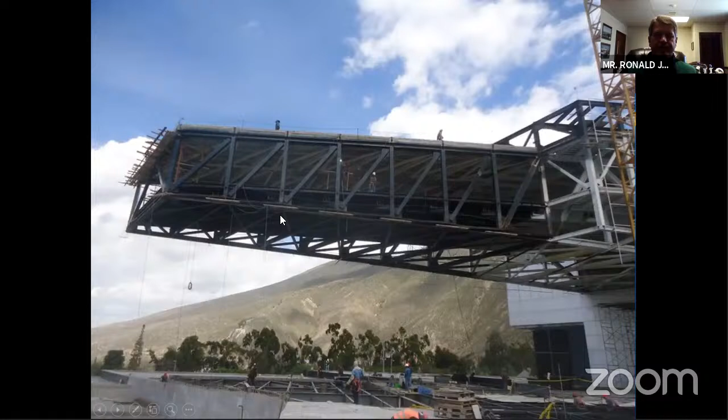So the design of the bearing - you can see the disc, but there's vertical springs, so they're concerned with vertical acceleration there. And then these are dampers, so as it cycles up and down, it also dampens the energy out. The bearings are located here supporting that cantilevered section of the floor. And that's actually been through an earthquake, so we know it works well.

I think in reality, what we do to these things in the lab probably far exceeds what it'll actually see during a seismic event, but it's nice to know that they work.

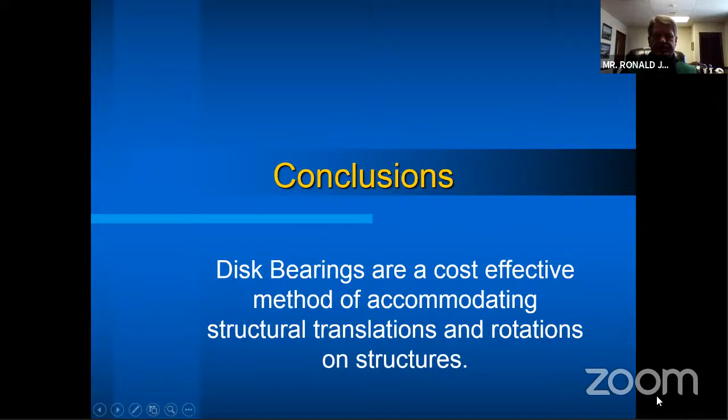Quick conclusions: Disk bearings are cost effective. Field inspections show that they provide long-term maintenance-free performance - they should last the life of your structure. Again, my cautionary note is deck drainage - keep the deck water off the plates, and they'll last a long time. And you can easily modify it for uplift, high horizontal force, isolation, or whatever you're trying to do.

We do a lot of proposal work, so if you had a project in mind, if you can give us the critical information, we'd be glad to work with you on that.

A couple of final points. We've heard other bearing manufacturers express concern over the central pin - you can't inspect it, and the pin transmits the horizontal forces. It's hermetically sealed in there. You've got 35 MPa pressure on the polyurethane pad, keeping contaminants out, so it's not going to corrode. In my over 40 years of experience, I've never heard of any of these pins failing, so it's protected in there very well.

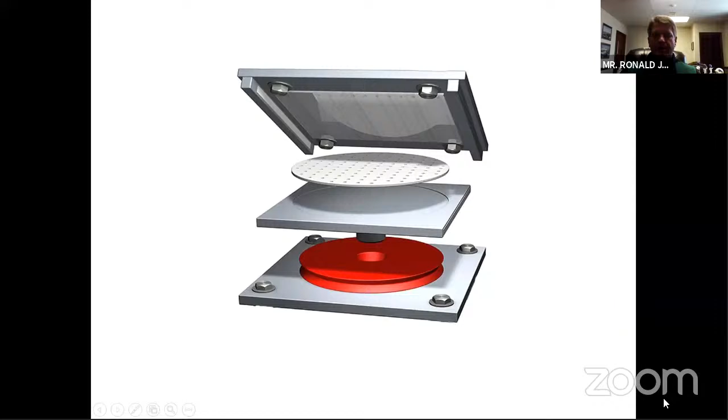The other concern is the rotational resistance of a disc bearing. It might be a little bit more than a spherical bearing, but it's still quite low. We haven't had any edge pressure failures of PTFE or anything like that either. So these are a couple things I've heard other people say about disc bearings, but really it's the bearing of choice in the USA now - that's what most engineers are specifying.

We also have a marketing alliance with a company called BDI for monitoring. Sometimes engineers want to monitor what's going on - what's the real load, what's the real rotation and movement. That can be done; we work with this company for monitoring. We also offer joint seals as well.